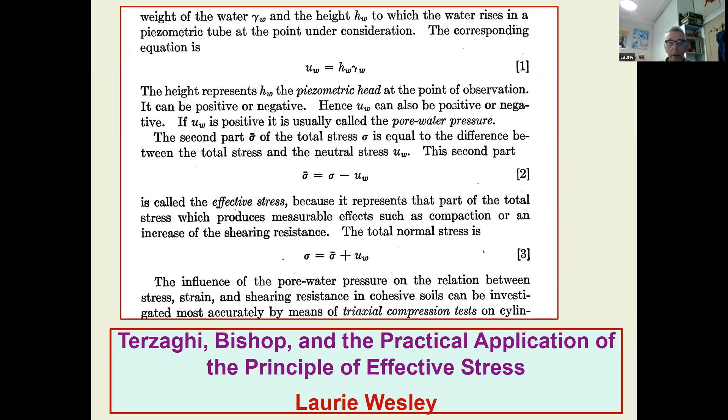Next one. Terzaghi is the undisputed founder or father of modern soil mechanics. The publication in 1925 of his book in German, Erdbaumechanik, is regarded as the birth date of soil mechanics. Terzaghi was born in 1883 in Prague into an Austrian family. His father was an officer in the Austrian army stationed in Prague at that time. He did a degree in mechanical engineering, but became interested in geology and eventually settled for a career as a civil engineer. His work career involved times in Vienna, Istanbul, America, back to Vienna, and finally settling in America. He died in 1963. And by the way, he was a very keen geologist and always emphasized the importance of geology for engineers.

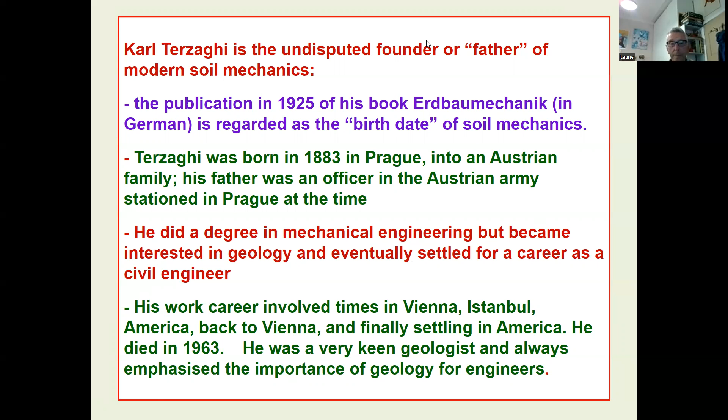Next slide. Terzaghi discovered and explained that when a force, pressure, or stress is applied to a soil, it will normally be resisted by both the soil particles and the water that occupies the space between the particles. As you know, the principle is expressed in a very simple equation: the effective stress is the total stress minus the pore pressure. Terzaghi maintained that change in soil volume or in strength only occurs as a result of a change in effective stress, not as a change in total stress.

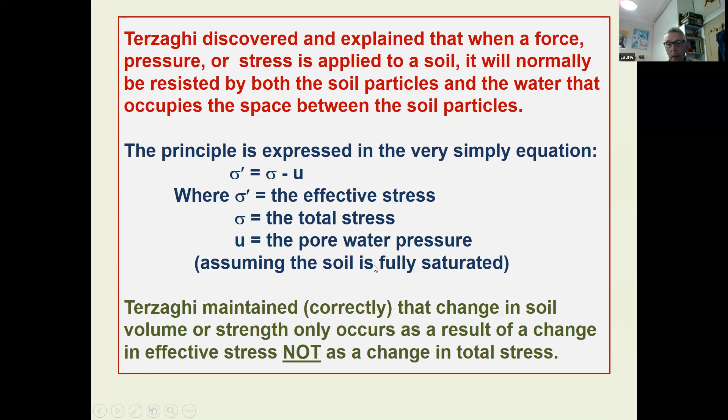Terzaghi adopted the basic equation for shear strength of soils that was established by Coulomb with studies of sand. Coulomb assumed that the value of sigma was the direct normal stress on the soil and that the soil behaved like a dry sand, unaware of any issues influencing that assumption. Terzaghi recognized that the value of sigma could be either total or effective stress. He also understood that the best way to investigate how soils responded to applied stresses was by undertaking triaxial tests, because in the triaxial test he had control of both the horizontal and the vertical stress. So he adopted that as it became the standard means for measuring the shear strength of soils. However, Terzaghi did not get as far as establishing a sound theoretical basis for applying the above equation and the results of triaxial tests to practical situations.

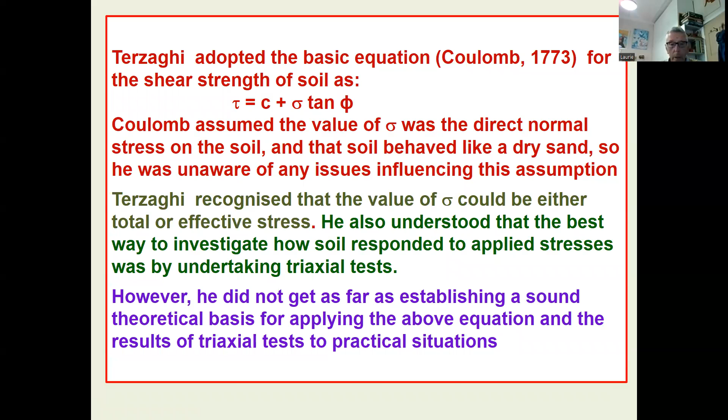Next slide. This is a quote from his book, Theoretical Soil Mechanics: 'For these reasons, the data required for making a stability computation pertaining to clays can at present be obtained only by means of the following purely empirical procedure. We test the clay in the laboratory under conditions of pressure and drainage similar to those under which the shear failure is likely to occur in the field, and we introduce values of C and phi into our equations.' And this is still Terzaghi.

It is obvious that the success of this procedure depends chiefly on the degree to which the experimenter has succeeded in imitating field conditions. This is where Bishop comes in: Terzaghi established the principle of effective stress, but failed to arrive at a rigorous method for applying it to the analysis of stability situations, especially slope stability. So Terzaghi's book and some published papers were all that Bishop really had to start his career with, and he very quickly realized the challenge was to establish how you apply the results of triaxial tests to field situations.

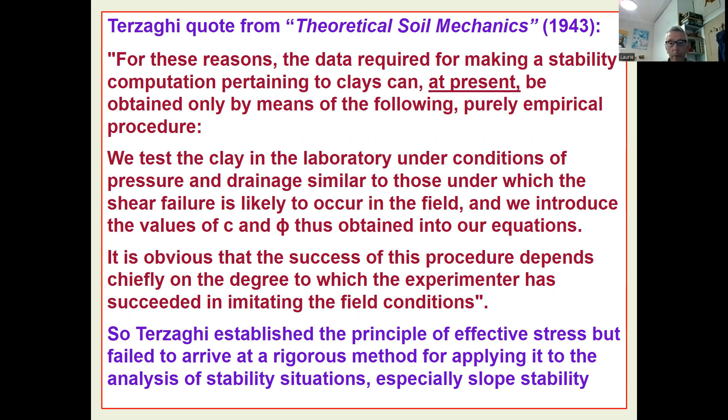Terzaghi's achievements were the result of unrelenting examination of how soils behave, primarily from careful observation in the field, but assisted by laboratory experiments. And he developed theories to explain that behavior.

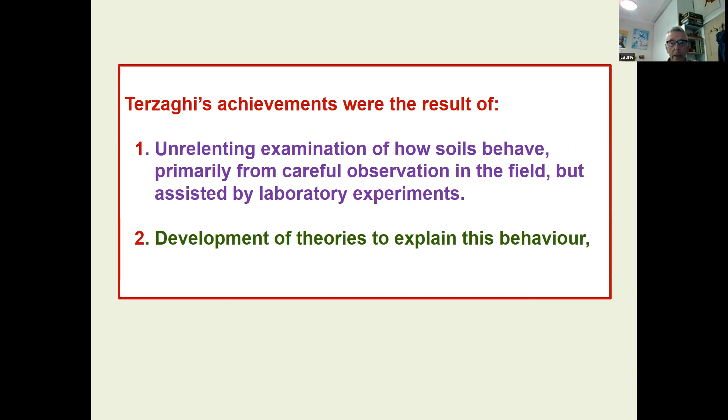Terzaghi's book, Theoretical Soil Mechanics, was published in 1943, and that was the year Alan Wilfred Bishop joined the Metropolitan Water Board, working closely with the soil mechanics group at the British Building Research Station. The leader of that group was Skempton. So that's how they met, actually—Bishop was working with the Metropolitan Water Board but became aware of the work Skempton was doing, and they worked together to solve some of the practical questions of the time.

This is a tribute that Skempton paid to Bishop after Bishop died young, at the age of 68. Skempton said: it was a great privilege and the best of good luck to be associated for nearly 40 years with one of the finest intellects in our subject. In no respect was his intellectual power seen more clearly than in his continued study of Terzaghi's principle of effective stress and its application to all branches of geotechnical engineering. His work in this field brought about a highly beneficial revolution in soil mechanics. Although reserved in a manner compatible with his Quaker faith, he appreciated a good sense of humor. He was loved and respected by his numerous students who came from all parts of the world. Through them, and the strict but friendly criticism of his colleagues' work, and his own important contributions, he exerted a unique influence.

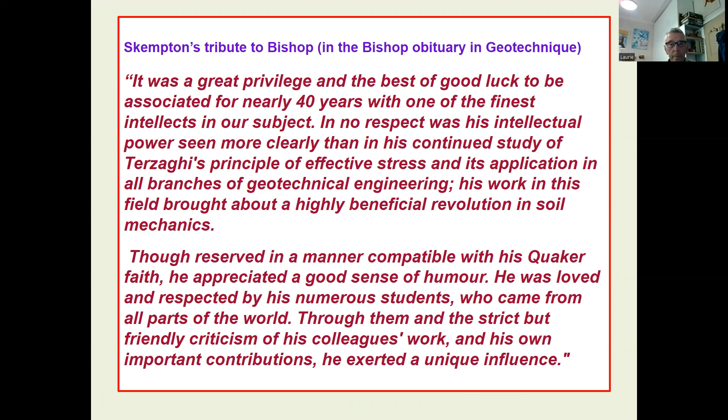It was in 1943 that Bishop joined the Water Board and became aware of the failure of the banks at the Chingford Reservoir, which was what Skempton was involved with. So he studied all of the papers available to him. They engaged Terzaghi to write a report on the failure of the Chingford Reservoir, and in fact I have a copy of that report. Bishop set out to try and solve this problem of how you apply shear strength to the stability of slopes.

The most important paper that Bishop ever wrote was published in 1960. By about 1953 or '54, Bishop had sorted out how you should apply the results of triaxial tests to stability analysis. He published that key 1960 paper at an ASCE specialty conference, co-authored with Bjerrum, who was the leader of the Norwegian Geotechnical Institute. The paper set out very clearly how you should apply either a total stress analysis or an effective stress analysis. It really solved the question which Terzaghi had failed to solve.

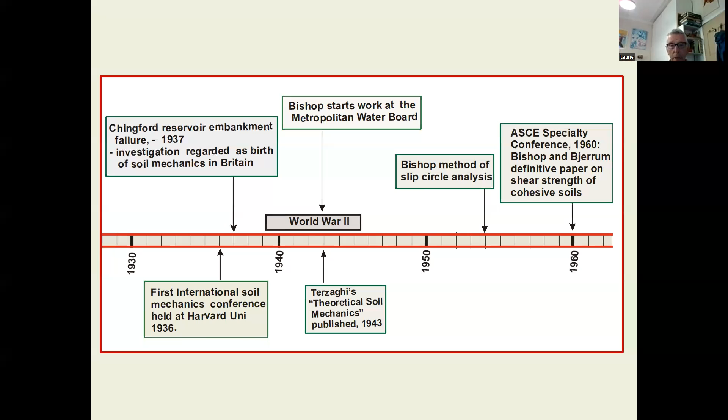Bishop's early years: a major slip occurred in 1937 during construction of an embankment for the new Chingford Reservoir. The thorough investigation of this slip is regarded as the birth of soil mechanics in England. Bishop, in 1943, joined a small soil mechanics group at the Building Research Station.

He was employed by the Metropolitan Water Board, but working with the BRS, which was responsible for investigating the cause of the failure and remedial measures. It also worked on modifying the design of a second reservoir, taking account of lessons learned from the Chingford failure. So Bishop was very quickly involved with the issue of slope stability, facing the issue left unresolved by Terzaghi—a rational way of using the results of triaxial tests for analyzing practical stability situations.

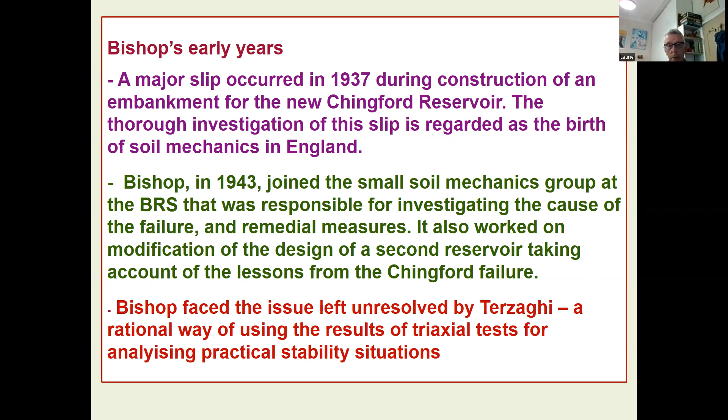Bishop was the ideal person to take up this challenge for several reasons. He was a very practical man. He began work as an engineer at the Metropolitan Water Board, where his first task was the design of a water-retaining embankment. His first job made him realize how important soil shear strength was for the safe design of reservoir embankments. He was fascinated by Terzaghi's effective stress concept and its formulation in a very simple equation. Bishop had a very sharp mind, essential for the development of theory.

He was also a very capable designer, and he knew how to design laboratory equipment. In fact, when he was still in his school years, he had persuaded his father to allow him to use part of the house as a workshop. So he already had his own workshop before he went to the University of Cambridge, where he took various subjects to get a degree there.

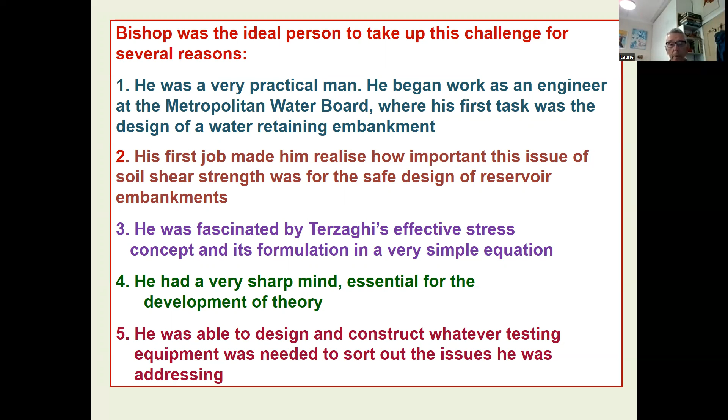A note on the Bishop method. Bishop is best known for his method of slip circle analysis. However, in the Bishop obituary by Angus Skinner, published in Geotechnique, we find these words: theory and practice, welded together by continually checking one against the other. This was the formula used so successfully by Bishop. This gives us a much broader understanding of the term the Bishop method.

People think of the Bishop method as the method of slope stability, but Bishop's method of operating by always checking theoretical things in practice was what made him very successful. As I've said, Bishop was a very practical man. His interest was in whatever helped solve practical problems. He had little or no interest in theory that was of no practical value.

For this reason, he had a very negative view of critical state soil mechanics. He worked on three fronts: the development of theory, the creation of laboratory equipment, and particularly field observation. He always emphasized field observation and the importance of geology.

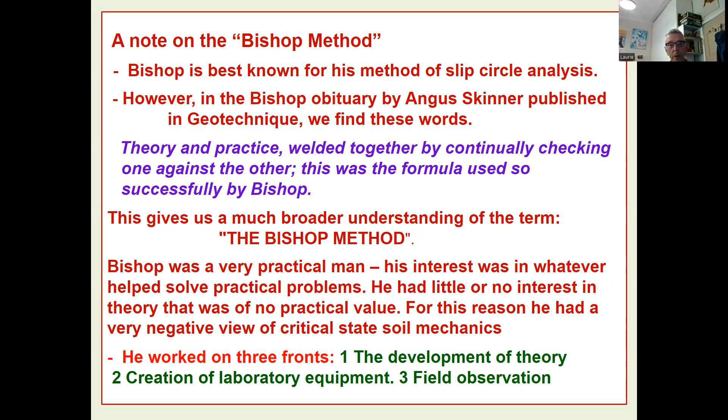Now, this actually is Bishop's first triaxial apparatus. I think it was the first triaxial apparatus operating in England, which he invented. It's quite sophisticated. I visited it when I was in London going through the archives of Imperial College, where they keep all of Bishop's papers and things. I also visited the Metropolitan Water Board.

It has a mechanical means of recording in graphical form the results of a test. There was no electronic stuff available, but it had a mechanical system and a rotating piece of graph paper, which gave you the graph. It also had a rotating bush at the top to get rid of friction between the bearing and the vertical rod that was bearing down on top of the soil. So it was a very clever design, typical of Bishop.

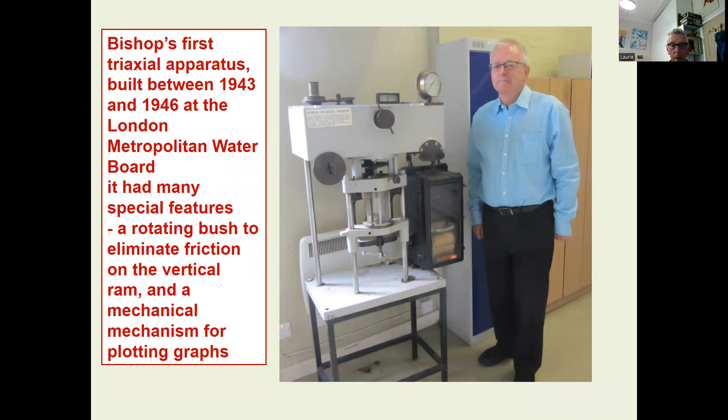But Bishop told me what he wanted. He wanted tests done with control over both the vertical stress and the horizontal stress. He told me to look around the laboratory and see if there was anything suitable. Obviously, to do that, at that time you had to have a hydraulic system, because you could more easily control the pressure on fluids than on solid pieces of equipment.

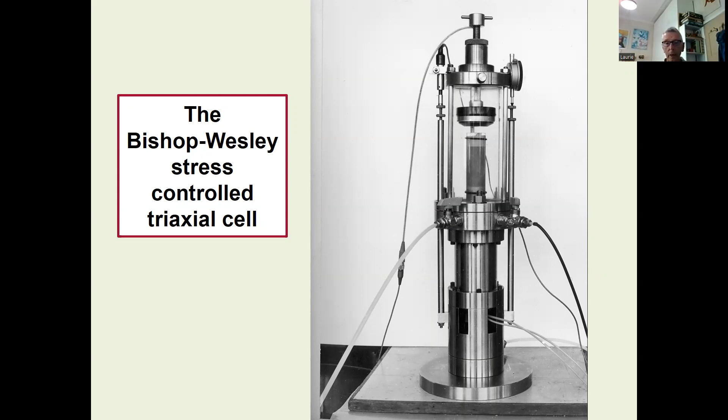Yeah, that's what I've already said.

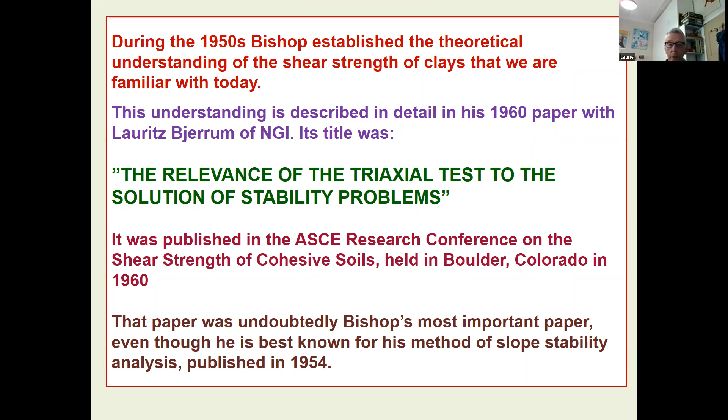During the 1950s, Bishop established the theoretical understanding of the shear strength of clays. This is described in detail in his 1960 paper on the relevance of the triaxial test to the solution of stability problems, published by the ASCE Research Conference on the Shear Strength of Cohesive Soils, held in Boulder in 1960. That paper was undoubtedly Bishop's most important, even though he is best known for his method of slope stability analysis, published in 1954.

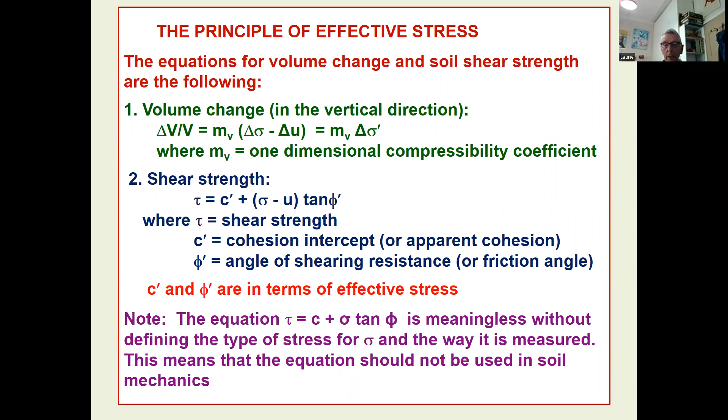Next slide. The shear strength determined using the above equation is the strength in terms of effective stress. To use the equation, it is necessary to know the value of the soil parameters C prime and phi prime, and the pore pressure U. That's a very basic statement about analysis in terms of effective stress - what you need to know.

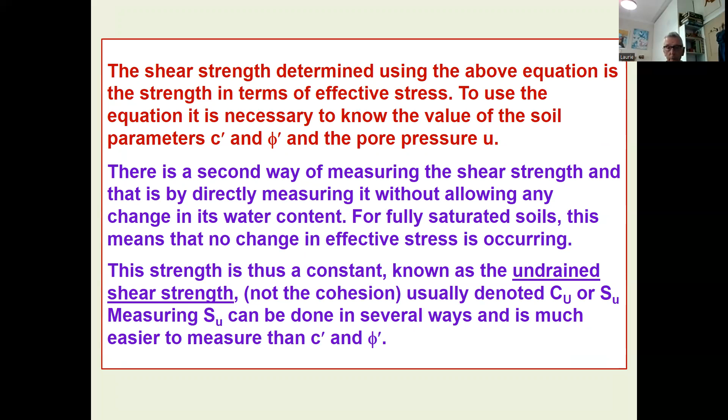There's a second way of measuring shear strength: by directly measuring it without allowing any change in water content. For fully saturated soils, this means no change in effective stress is occurring, and this strength is thus a constant known as the undrained shear strength. Some people call it cohesion, but that's not a sound term. I think Bishop invented the term undrained shear strength, denoted by CU or SU. Measuring SU can be done in several ways, and is much easier to measure than C prime and phi prime, the effective strength parameters.

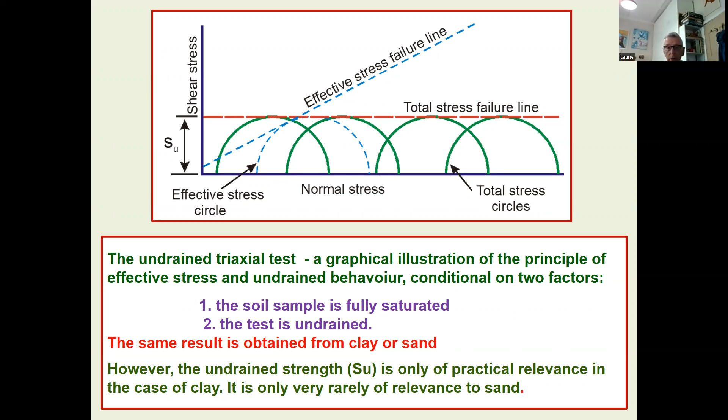Okay, next picture, next slide.

Bishop established that the geotechnical engineer normally has a choice of two methods for analyzing a stability situation: an undrained or total stress analysis based on the undrained shear strength. Skempton always called it the phi equals naught method, which was sort of valid in a way, but Bishop's statement is that it is a total stress method of analysis rather than a phi equals naught method, though it does give you the apparent value of phi equal to 0.

So you've got that as one method, and you've got an analysis in terms of effective stress based on the effective stress parameters. The latter is sometimes called a drained analysis, but that's not a sensible term. Analysis in terms of effective stress makes no assumption about whether failure will be drained or undrained, and an undrained situation can be analysed in terms of effective stress. There's nothing to stop you analysing an undrained situation, provided you know C, phi, and the pore pressure, which in many cases is the more difficult one to determine.

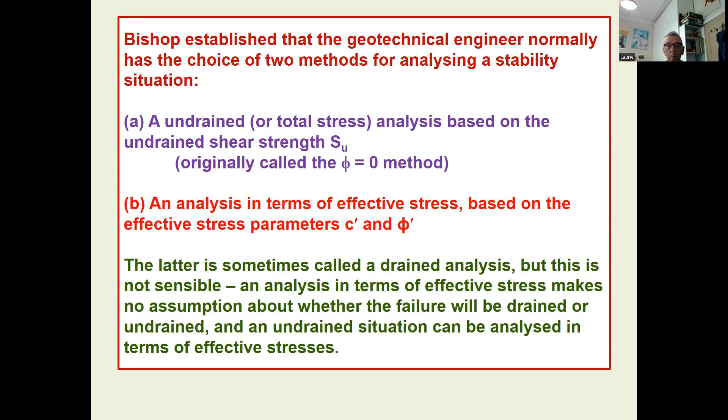Bishop stated that for most stability situations, there are two cases to consider: the end of construction or immediate case. Stability in this case can be estimated using a total stress analysis, based on the assumption that the clay is of very low permeability and the undrained strength does not change during construction. The long-term case applies when sufficient time has passed for pore pressures to reach their equilibrium steady state. Stability here is normally determined using an effective stress analysis, but there are cases where a total stress analysis may be appropriate, taking into account the change in undrained strength that may have already occurred.

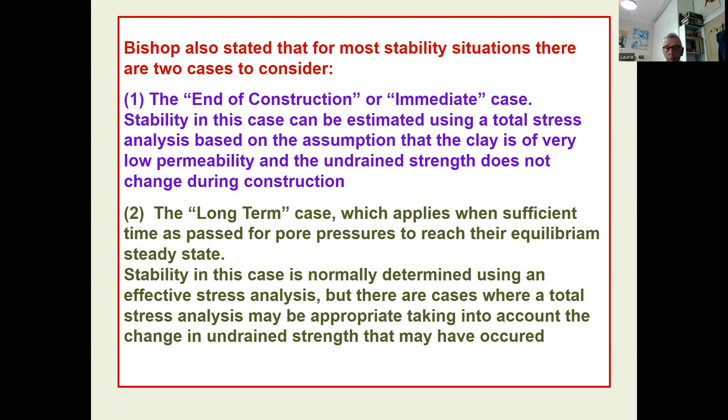This is just explaining why you can always design your foundations on clay using the undrained shear strength. When you build a building, it applies a load to it, and the pore pressure beneath it will rise and it will slowly drain away. So in that case, on the left, the strength of the soil will steadily increase with time. So you are perfectly sound in determining the shear strength or the bearing capacity using the undrained strength of the material. But the opposite is the case on the right-hand side.

When you do an excavation, it will take off the load acting on the soil, and it will tend to lower the pore pressures beneath if the behavior is still undrained. But because the pore pressures anywhere you have taken the load off are now lower than those elsewhere, water will start to flow towards the excavation. If that happens, the strength will steadily decrease. So you can't estimate the stability of cut slopes using a total stress analysis, because in that case the undrained shear strength will steadily decrease with time. That's just a simple explanation of the basis or the reason why we can use the undrained strength for determining bearing capacity, but we can't use it for estimating the long-term stability of cut slopes.

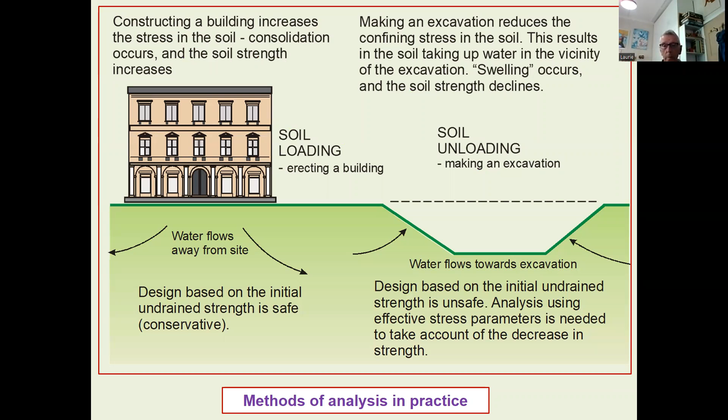For made slopes, such as cut slopes in original ground or embankments, it is generally necessary to make two estimates of stability: the situation at the end of construction and the long-term situation. The estimates are likely to be different because the pore pressure state will probably change with time and thus produce different values of safety factor.

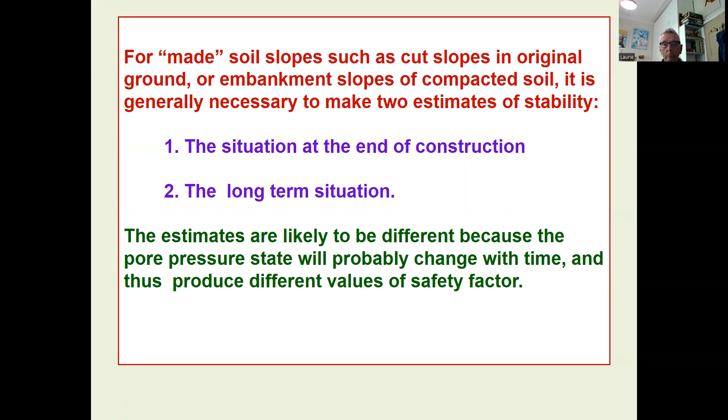This is just an important point. Soil will behave in an undrained state in either of the following situations: when the water is unable to flow in or out of the soil because all boundaries are impermeable, which is the case in an undrained triaxial test - that is one case where the behavior will be undrained. The second is when the soil permeability is very low and the loads or stresses are applied rapidly, as for example when an excavation is made rapidly or a storage tank is filled quickly in low permeability soil. In that case, it is behaving in an undrained manner simply because there isn't time for the pore pressure to get out, whereas in the first case it can't get out because none of the outlets are available.

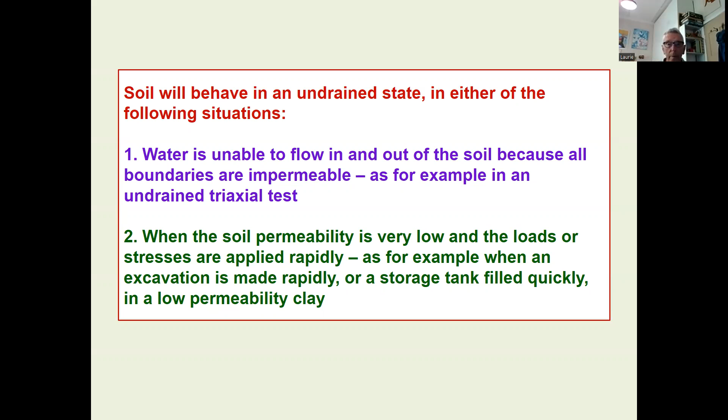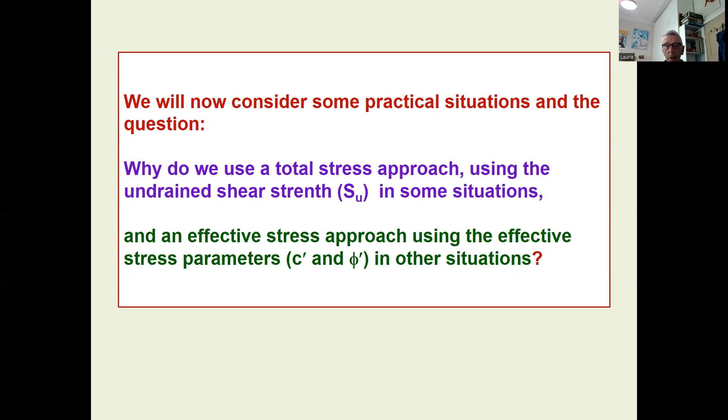We will now consider some practical situations and look at the question: why do we use a total stress approach using the undrained shear strength in some situations, and an effective stress approach using the effective stress parameters in other situations? I partly answered that already.

Bearing capacity is almost always based on the undrained shear strength SU, for two reasons. The SU is the initial strength and it will increase with time, so the approach is safe. It is also much easier to measure SU than the values of C dashed, phi dashed, and U, the pore pressure - all three would be needed to make an estimate using an effective stress method. In other words, if you put a building on clay and try to estimate the stability situation, you need to know C, phi, and the pore pressure.

The C and phi you can measure in the laboratory, but the value of U will be the pore pressure that was there at the start, plus whatever additional increase in pore pressure occurs when you build the building, which will be variable. It will be one value near the edges and another at the middle. So trying to use an effective stress analysis to come up with the bearing capacity of a clay is not an easy task. The other situation, of course, is those three possible foundations.

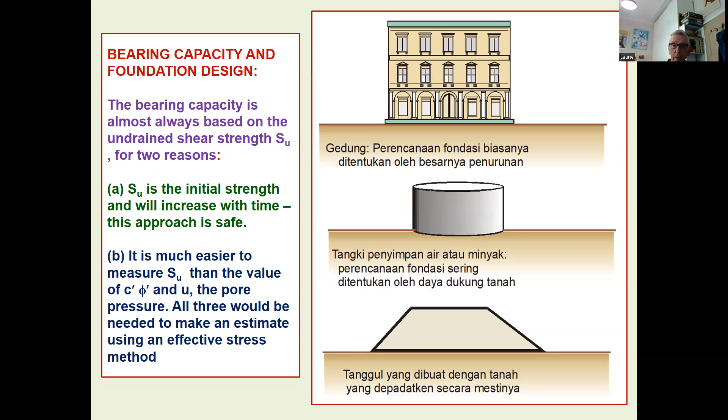But the same issue arises whether you're building a building, filling a tank, or building an embankment. It's always easier to estimate the bearing capacity using the undrained shear strength. Right, I'll carry on to the next one.

Now the slope stability situation is almost always done using an effective stress analysis. The advantages of an effective stress analysis are, especially theoretically, that the safety factor is more reliable than from a total stress analysis. The effective stresses enable the seepage state to be included and its influence on the safety factor investigated.

I think you're all sufficiently familiar that you need to know those three. In general, you can make some assumptions about a phreatic surface, or if you don't know the actual value, you can assume one. But the pore pressure will probably be the least certain parameter you use when you analyze the stability of a slope. Right, next slide.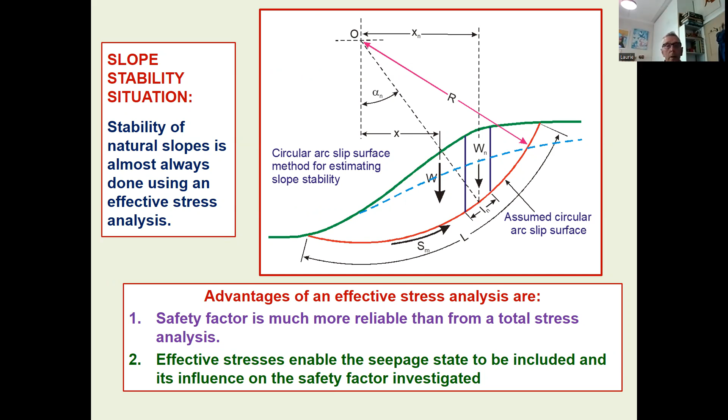Just looking at these, designers will use different approaches, but for the design of a retaining wall, a total stress analysis is likely to give an unsafe answer. A long-term analysis using effective stress gives a more reliable answer. I think that applies to any situation, but the stress that eventually ends up acting on the wall is very dependent on the way you do the building.

If you look at the first one here, you're probably going to make an excavation, have a temporary cut, and then fill it up with backfill. So you immediately have a whole range of possible failure planes, one in the backfill and one in the natural ground. It's probable that the values of C and phi in the natural ground are less than those in the backfill. You'll tend to choose some nice granular backfill with quite high values of phi. But again, you would always do an analysis in terms of the effective strength parameters rather than the undrained strength.

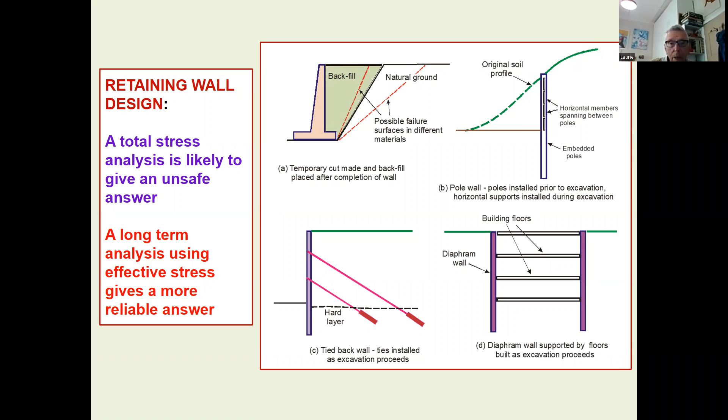Compacted embankment on the soft clay. Now this was Bishop's project that he was involved with, that I did my testing for my PhD.

So that was why Bishop had the research grant. It was to do an investigation of the shear strength properties of the soft clay. That was what my PhD was worked out. So just some notes about a compacted embankment on soft clay.

If the embankment is made of granular material, the analysis should use for the clay layer underneath the undrained shear strength, and for the sand, the effective stress friction angle. If the embankment is made of clay, the analysis should use for both materials the undrained shear strength.

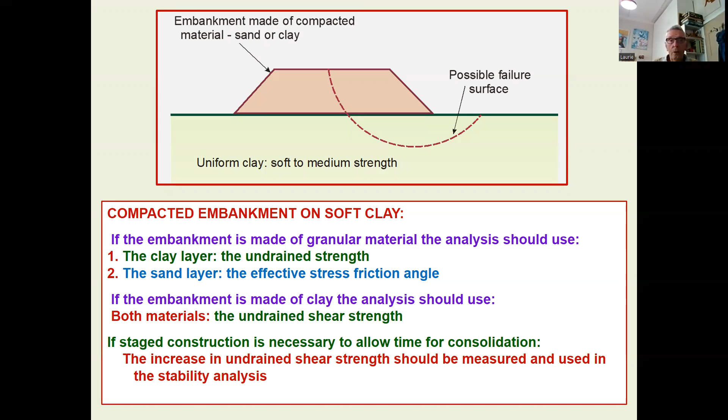Questions that arise regarding analysis in terms of total stress and in terms of effective stress. Should both methods give the same answer, e.g. the same safety factor? If the answers are different, which gives the correct answer? On to the next picture.

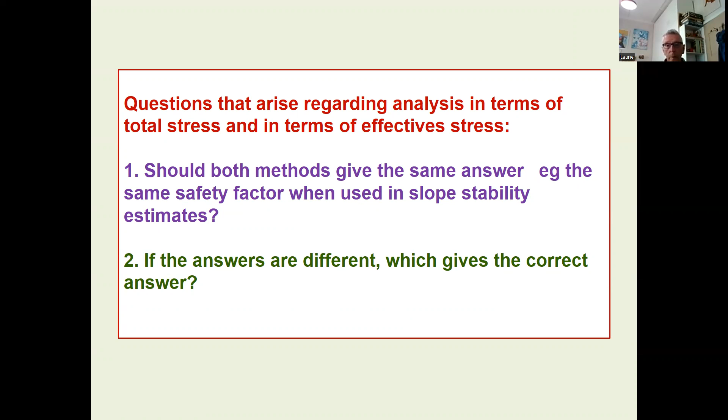Yeah, let's just think about this. We're thinking about the shear strength on a plane, like in the top one there, that brown line there, where we've got a possible failure occurring on that plane. We can determine the C and the phi value, and we can measure the pore pressures. So we can do a set of triaxial tests and establish the Mohr-Coulomb failure line there.

So with that information above, we can plot in the value of the effective stress. If you look at the bottom there, the green line coming up, that's the effective stress that we have estimated is the effective stress on some plane in the field, or particularly on a circular surface on which a failure might occur. So that's the strength you would use, or it's the strength that you would think was justified because you're putting into the picture at the bottom the effective stress in the field, and you're reading off on that line what the effective strength would be.

But you must remember that when you did your triaxial test, you created an increase in the pore pressure. You can't do an undrained triaxial test without the pore pressure increasing or decreasing. And most people measure the c and phi values during consolidated undrained tests.

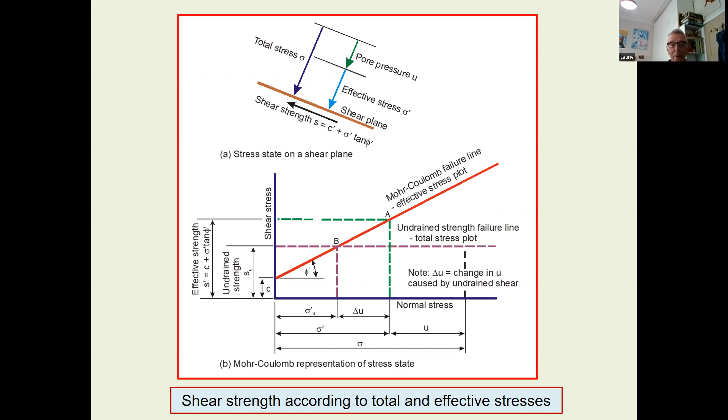This is an assumed situation. The red line is an assumed possible failure line. In your analysis, what I'm plotting with those arrows are the values of shear strength being used. If you're using the undrained strength, in all probability you'll be assigning a uniform value all the way around that red line. So you'd have that graph of undrained shear strength, uniform all the way around, provided your clay is uniform. That's what people would do using an undrained analysis.

But if you were doing it in terms of effective stress, your analysis would be reading off the effective stress on that red line, which would be very little at each end. So you'd be starting at almost a zero value at each end, and as the effective stress along that line increases, you'd have an increase. So you're actually using quite different values of your strength parameter in the stability analysis. Strength along a potential slip surface using total stress versus effective stress is quite different. That answers the question as to why you won't get the same answer from an effective stress analysis as from a total stress analysis.

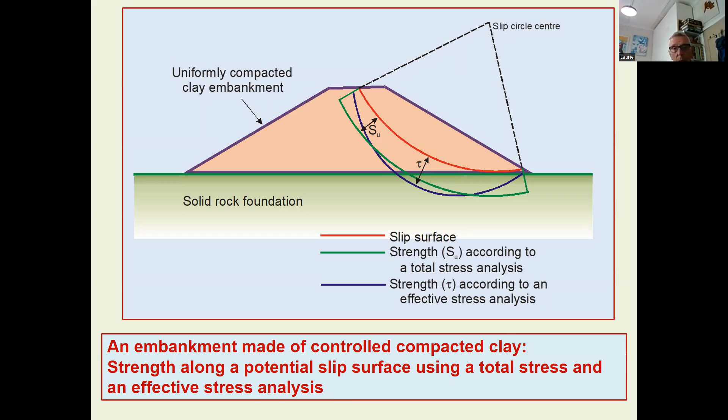Next picture, we're just about coming to the end, I think. Yes, this is just explaining what happens when you make an excavation into clay. This was a big issue actually in the early years of soil mechanics. They had built their railway systems, particularly in London and other areas, in a lot of cases through heavily over-consolidated sedimentary clays. Their cuttings were staying stable for many years, sometimes decades, and then they would fail.

If you've ever read Skempton's Rankine lecture, he has a concept there whereby, because these clays are fissured clays, their strength was steadily decreasing with time, leading to failure. But that hypothesis proved not to be correct. One of my fellow PhD students at the time was measuring pore pressure changes in long established cuttings in London clay, and she found that just over the time of her PhD, 3 to 5 years, in some of the cuttings the pore pressure was still steadily increasing. It hadn't reached its equilibrium value.

Now, this is just an attempt to illustrate what happens when you make a cutting in a very low permeability clay, like London clay or Lias clay or some of the English clays — you're taking load off here, and so you're inducing negative pore pressures down below. If you assume your pore pressure response is the same as you'd expect from this depth of excavation, you get those blue lines there. In other words, your original water table becomes the blue line. The pore pressure is dropping all the way along, but it doesn't drop at all at the top, which is why I've shown the original water table in there. At the end of construction, if the thing is undrained, you're making a bit of an approximate assumption, because there's movement occurring in the horizontal as well as the vertical direction.

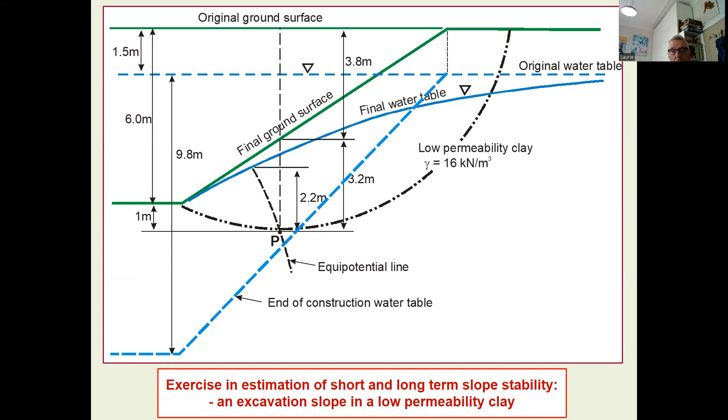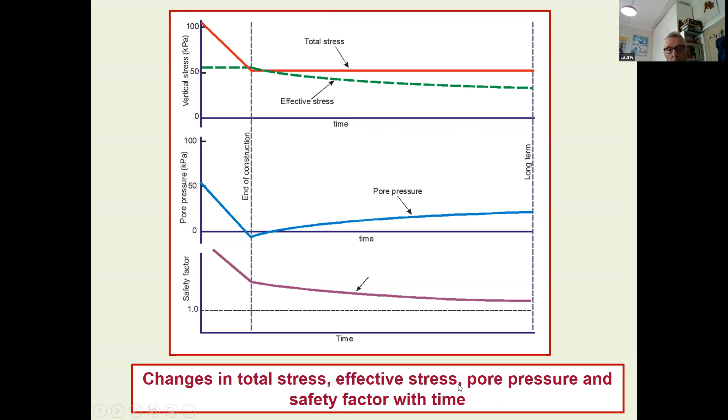That last slide was valid for low permeability clays. If you're talking about residual soils, they've often got much higher permeability - many times higher - so that picture is no longer valid. I've tried to imagine something a bit more realistic.

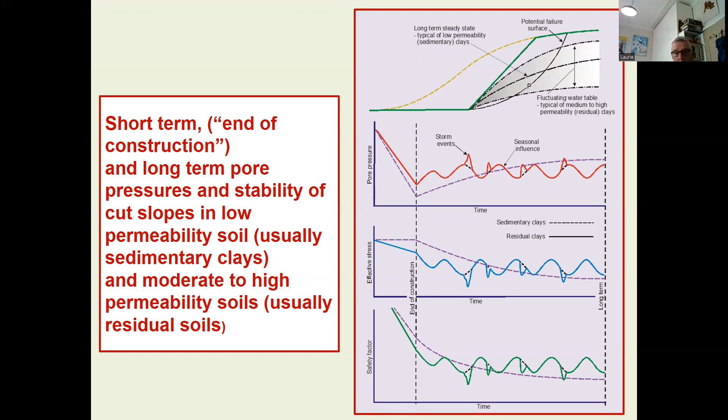Those are the ones that normally cause the failures. We've had massive rainfall here in Auckland and other parts of New Zealand, so there are many hundreds of slips all around the country at the moment. So I'll just read what I've written here: short term, end of construction, and long-term pore pressures and the stability of cut slopes in low permeability soils, as I've just explained, and in moderate to high permeability soils. Next slide.

And that brings me to the end.

I did my PhD between 1972 and 1976. I then came back and worked for a consulting company, during which I had to go to London to be a witness in a contract dispute. It was over the construction of a dam on the island of Mauritius, and there were issues about unforeseen soil conditions. But while I was there, I rang up Bishop, and he invited me to come out and meet his wife.

Bishop had always been a bachelor. He was still a bachelor when I was there, but he had quite a serious mental breakdown, due to the results of some pills he was taking for mild depression. The pills had a bad effect on him and he had a breakdown, and he never went back to Imperial College, but he recovered from the breakdown quite well. Then his specialist told him he should take up something other than just returning to his old life as a professor of soil mechanics.

He found out that Bishop didn't drive a car, so he suggested that Bishop should learn to drive. Bishop was only in hospital undergoing treatment for about 3 months. His family had been very friendly with the family whose daughter was Myrtle. She had married but was a widow, and she knew Bishop had been ill and was learning to drive, so she offered to help him learn, which she did, and he learned to drive a car.